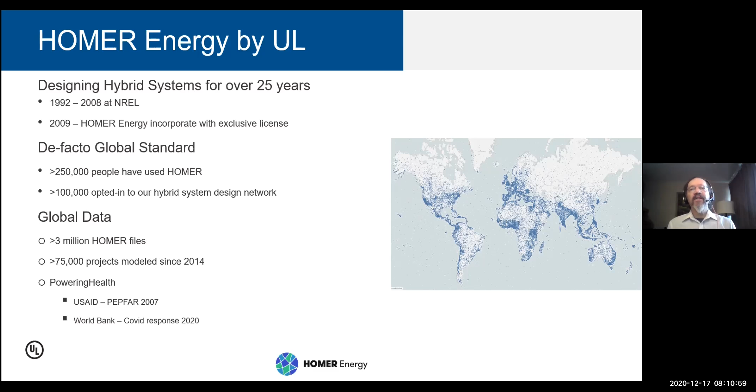The original Powering Health was created with funding from USAID. PEPFAR stands for the President's Emergency Plan for AIDS Relief. So that was 13 years ago. And then in the spring of this year, the World Bank contacted us and said, let's update that for COVID response. And so what I'm going to show you is the updated version of that.

And just a little background on what Homer is. It's an optimization software. And you need to know things like fuel prices and interest rates, et cetera, for the economics. You need to know the load profile. That's the main thing I'll be showing, actually, is how to generate that. You need to know what the site-specific renewable resources are, which we have global databases of renewable resources. So that's just click on a map and that's easy.

And we have a library of equipment. For this simple web app, we generally just use generic equipment, but you can then download those results, look at them in Homer in the more powerful desktop versions, and then we have an extensive library of different batteries and inverters, et cetera. Anyway, those are all the inputs.

And the way Homer works, it simulates the operation of a power system for an entire year, or actually up to 30 years if you want, but for this web app, just 1 year. In hourly time steps; we can go down to 1 minute time steps in the desktop product. How is that system going to operate? If it has a backup generator, how much fuel is it going to use? How much are the batteries going to get used? Are the loads going to be fully met, et cetera? And that tells you what it's going to cost to build and operate that system.

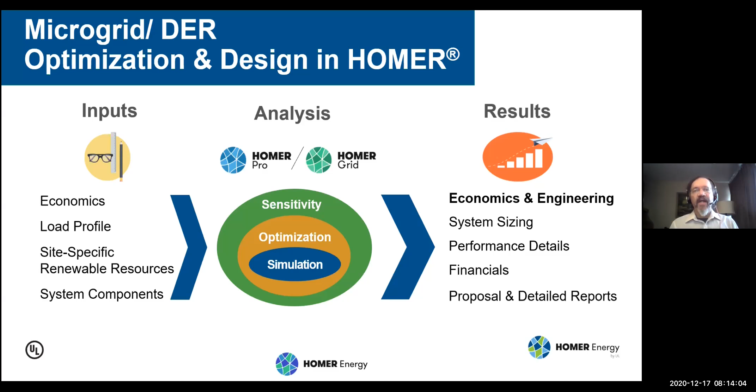And then you get all kinds of results, and I'll show examples. The main one is, what does the least cost system look like? What's the size of different components? But also things like cost of energy, internal rate of return or return on investment, et cetera. You can drill down and see hour by hour how the system actually operated, and it will produce a proposal or reports. So that's an overview of how the system works. I think that's my last slide. So I'm going to switch screens here and show the actual app.

So if you go on the web and type in poweringhealth.homerenergy.com, this is where you get, and we've got a lot of information here to help you. These little arrows show that there's more there. This guidance note is quite substantial. Oops, wait a minute. Oh, sorry, it's down here. Well, it's a Word document with lots of information. Hopefully you can see this. But I'm not going to go through it. It's a very long Word document with lots of information about the energy requirements for remote health facilities.

But what I want to show is just walk you through the tool. So by clicking on a map here, you get resource data for that location, and you can zoom in and scroll around, etc. Now it will work for grid connected or off grid systems. For the grid connected systems, we're assuming this is remote, and maybe there's a diesel power system but maybe it doesn't run all the time. It only runs in the evening or whatever. So you can say it turns on at a certain time, runs for 6 hours, etc. For this, I'm going to assume there is no grid.

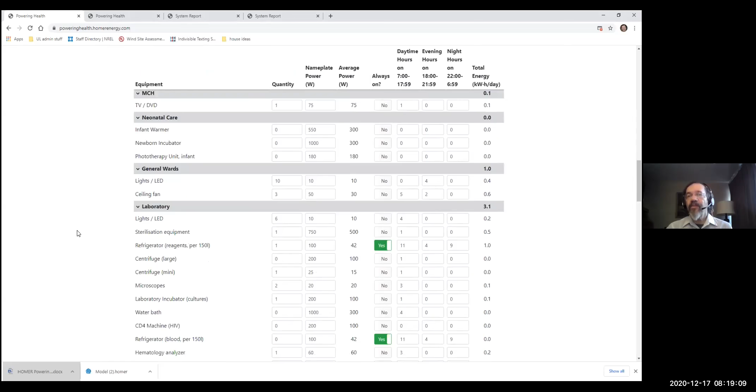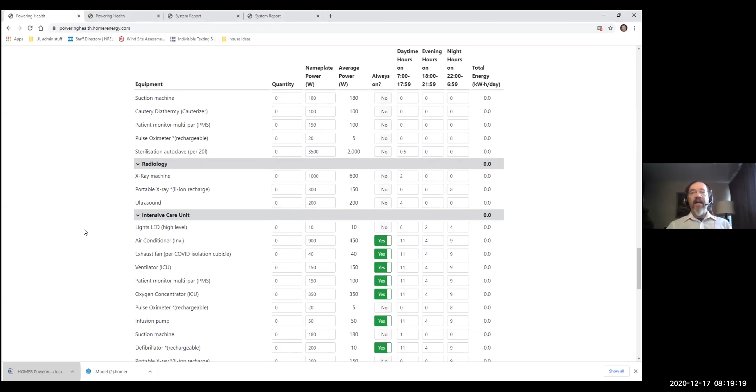So lots of different equipment here. You can collapse and expand them as needed. And you're going to want to look at this and make sure it makes sense for your facility. But you can also do things like, well, if I were to buy a bigger air conditioner, let's say, what would that do to my energy requirements and the size of the power system I might need, et cetera. So we have a lot of stuff here. We have even housing for the staff, water pumps. Again, this is just 3 classic sizes, and presumably you don't have all 3. You have one. Pick one, and you might need to modify the size, of course.

Most importantly, you can add anything you want. So this is your special whatever equipment. And then you have to say how many of them, how big they are, does it have a duty cycle, and when does it run? And you can do as many of these as you want.

So when you've got this all set up, you just hit calculate, and I'm going to cheat here like they do on cooking shows where you put it in the oven and then suddenly the turkey's all done. Here's what you get when you're done. It doesn't take that long. It takes maybe a minute or 2 to run.

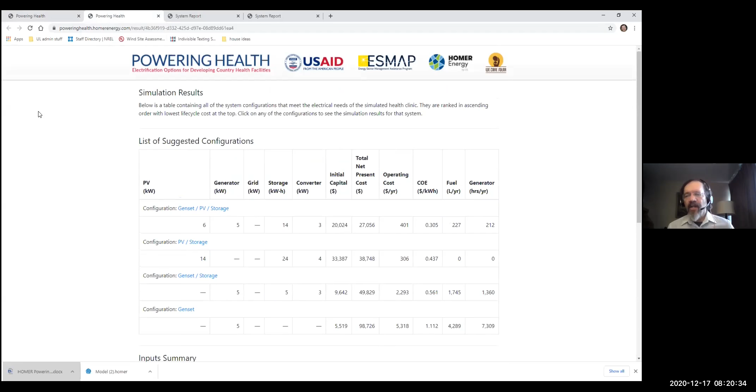And so we have 4 different what we call architectures or configurations. This is the full hybrid system with a backup generator. Here's the same thing without the backup generator. Here's if you ran with the genset alone, or if you add a battery to the genset. And they're ranked by net present cost or cost of energy. And you can see the one with the backup generator is the least cost system, even though the backup generator only runs 212 hours a year and only uses 227 liters of fuel. So you can design a system without a backup generator, but it's going to be a lot larger, with a higher capital cost.

And so that's up to you whether it's worth that or not to avoid the hassle of having a backup generator. But the backup generator, even though it doesn't run very much, saves a lot of capital cost. But you can see compared to the pure generator system, which has a very low capital cost but very high operating costs and cost of energy, et cetera, this is preferable.

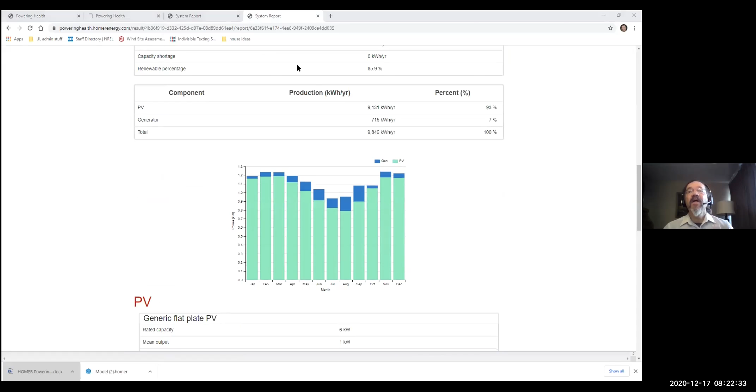So you can further get a lot more results by clicking on any one of these 4, and that takes you to here, which is a lot of detailed results. And I won't go through all of them, but here's the cost breakdown by type, by component. Here's where the power came from, and you can see the generator is mostly used during the rainy period, which makes sense.

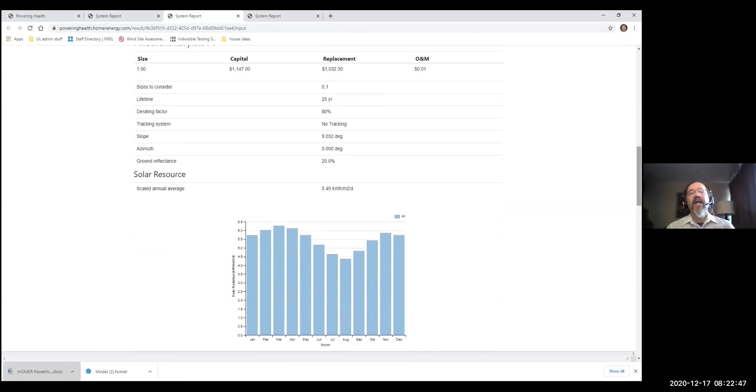And lots of information about how it ran. We also have a report here. Here's a list of all the inputs. Again, what I think is really valuable is the ability to download the file. So when this ran on the server, it ran HOMER, and it created a real HOMER file, which I've downloaded over here, and I can view that in, let me pull it up here.

Hopefully you've all been seeing what I've been showing. Peter, we're not seeing it. I think you need to share your entire screen instead of just the window. Right. So were you seeing what I was showing before, hopefully? Yes, we were seeing the entire application, but not seeing the document that you put up at the beginning. That did not show up. Yeah, well, that was okay. I figured that wasn't working, and you didn't miss much there. So you should be seeing my whole screen now.

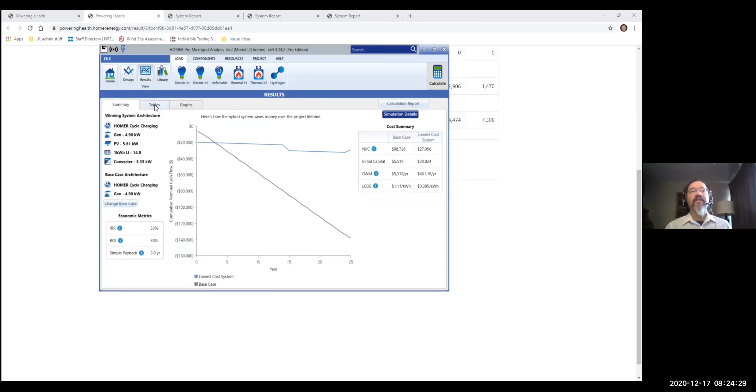And here is HOMER. So I downloaded the file that was created on the server, and I opened it on my computer, and this should have the same results. It'll be in a slightly different form, but this table down here is the same one that we saw on the website, almost exactly the same. We modified it a little, and here's where you can dig in more detail. Again, this is just formatted differently, but it's the same information I showed before.

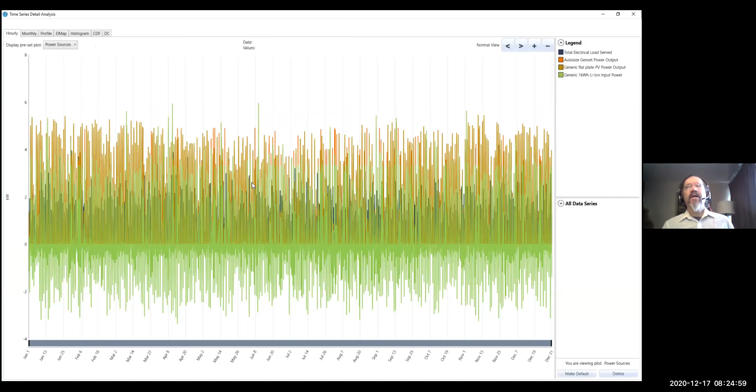But what's really interesting is you can actually go in and see how the system actually operated across the whole year. You can zoom in. I'm going to wrap it up a little bit here, because I can get carried away because there's an enormous amount of detail that we can show here. Like there's the solar resource for the whole year, 365 days of the year, 24 hours of the day. Each one of these little colored dots is an hour. So right here is like a 3-day cloudy period.

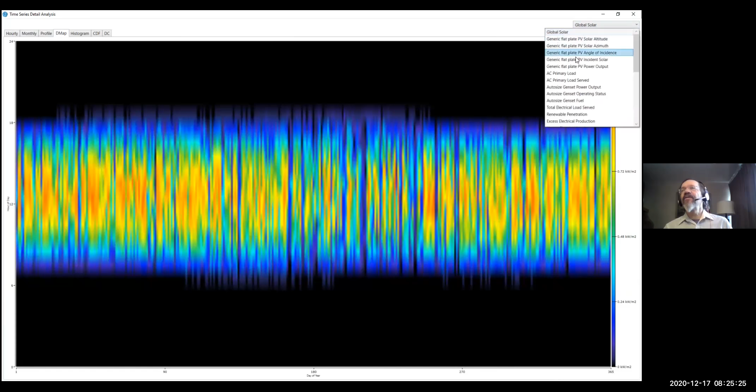And we can do that for all the different variables. Here's what the load looked like in the same way. We can look at daily profiles. We can get really carried away here, which I don't want to go too deep into.

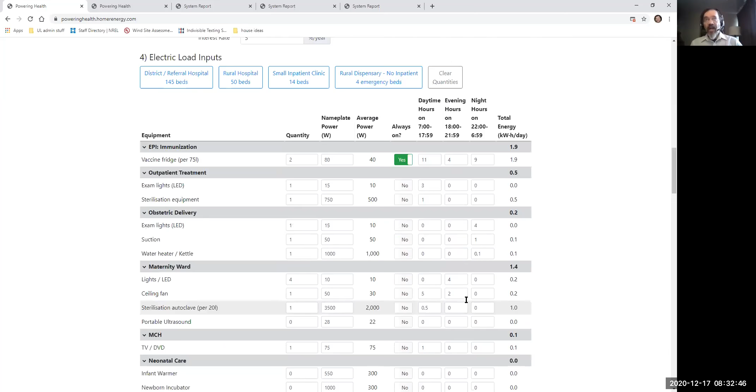How large a system can be modeled using this capability? Well, there's no real limit on the desktop side. On the web app, this system here is a reasonably large hospital, and its total, going down to the bottom here, is 360 kilowatt hours per day, so that's 10,000 kilowatt hours a month. You could model something larger than that as well.

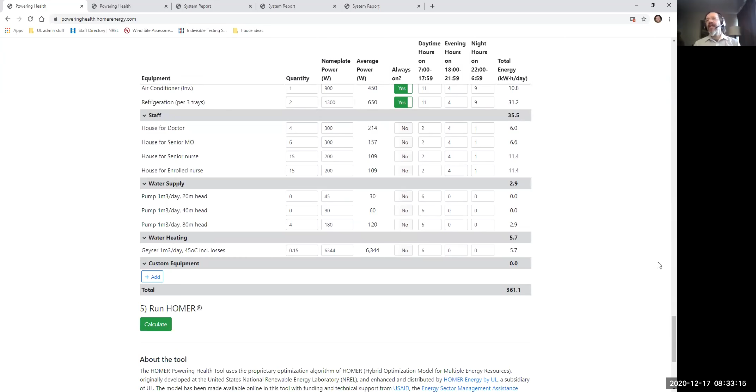I think the main limitation on size is that we're assuming a single backup generator. So when you get to really large systems, you're probably going to have more than one backup generator. And I don't just mean for redundancy purposes. You probably want more than one anyway, in case one's on maintenance, but they might be identical and they never run at the same time. But in really large systems, they have multiple generators, and they can either parallel with each other or they're different sizes. They're not just for redundancy purposes.

So anyway, we have used Homer to model islands the size of Aruba or Maui or St. Thomas. You know, that's 100 megawatt, 150 megawatt systems, much larger than you'd want for a rural health clinic.

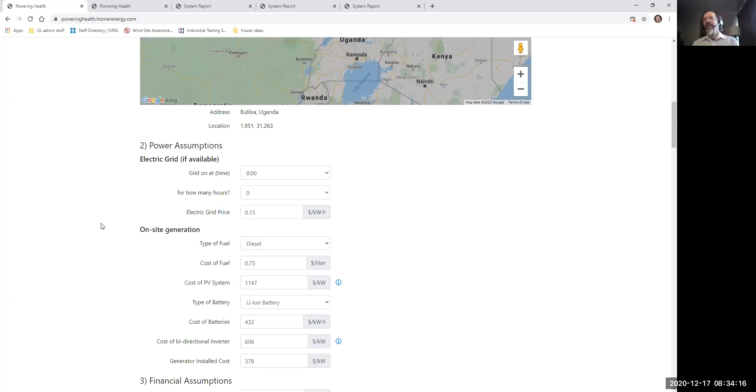In the desktop app, you can have as many generators as you want, but in the web app, we're assuming a single generator. That's the main limitation on size, I think.

So let's see, and there's no other questions coming in through the chat. How am I doing? Oh, got lots of time.

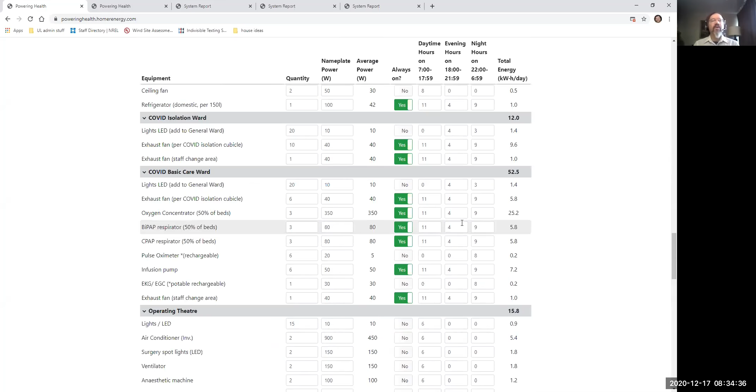I think what I'll do then is show you. So for this larger hospital, I haven't modified it in any way, just to show you. It takes, like I said, a minute or two to run, and so I might as well show that. So this system was imagining having 357 kilowatts of PV if you were trying to do it without a generator. With the generator, of course, the PV and the battery can be a lot smaller.

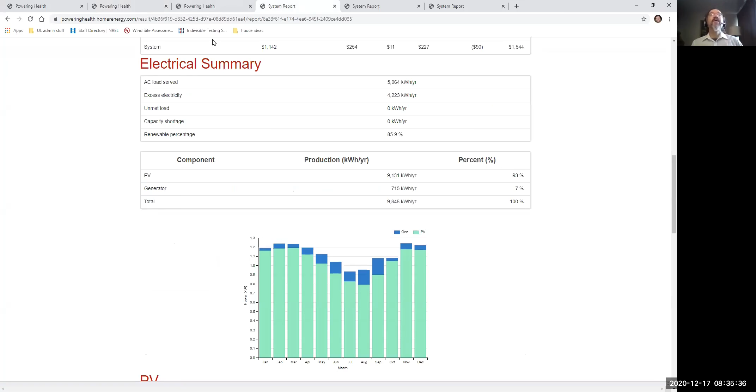I think it's worthwhile to show some of the other results that you can get out of it. For example, the batteries are a really critical issue. So we were talking about 14 batteries. In reality, you probably want to redesign things so that they're in strings, and 14 might not configure into strings correctly. So that's where during a final design you would want to use the desktop app.

Our target market for this are the planners, the healthcare facility manager, whoever that is, who may not really be an energy expert but wants to get some idea of what's possible. And then he or she is going to want to talk to a local solar company to do the installation. But it's enormously helpful if they already have some idea of what they need, both in conversations with that solar installer, but also in conversations with funding organizations.

Like this system was going to need, I can't remember, $20,000, I think. Without something like this, it's hard to have a conversation with a funding organization about, well, we need a power system. How much is it going to cost? You need to have some information to answer those questions.

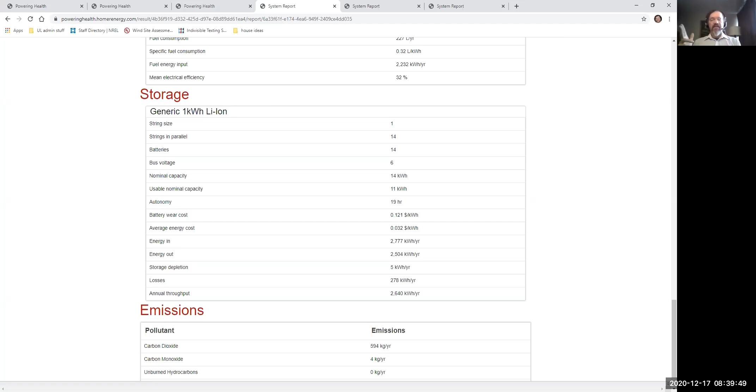How do we find the UL services? Well, on our website, maybe I'll just go to our website here.

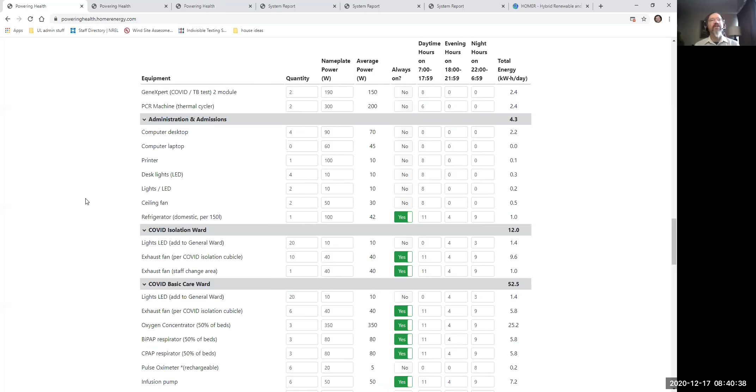What's the next one? What does the emission measurement for pollution represent or stand for? Well, let me remember what we did on the website. I don't think we did much on the website with emissions. Let me just go back up here. No, but in HOMER proper, we do a lot with emissions. You can put in a carbon tax and see how that affects the design, the least cost design of the system.

You can put a constraint on the design that says, okay, design a microgrid that emits no more than X amount of carbon. You can do a sensitivity on that number and create a graph I find very interesting that shows that the least cost system produces a lot less emissions than a pure diesel system. By adding more and more PV and batteries, you can reduce the emissions even further. It gets very nonlinear as you try to go to zero. And that's a really useful graph to look at.

And you can do the same thing with any of the others, like nitrogen oxides and sulfur and particulates and volatiles, any of the emissions. Most of the interest is in carbon, but you can do it for any of them.

Ethanol in the desktop application. So in this application, we have these three fuels. Propane's a pretty common one, frankly, or LPG. I guess in most of the world it's called LPG. The purpose of the web app was to simplify things. If you give people too many options, it gets too confusing and hard to use. So we want to make it easy to use. Desktop application, yeah, you can use ethanol, and you can create your own fuels as well.